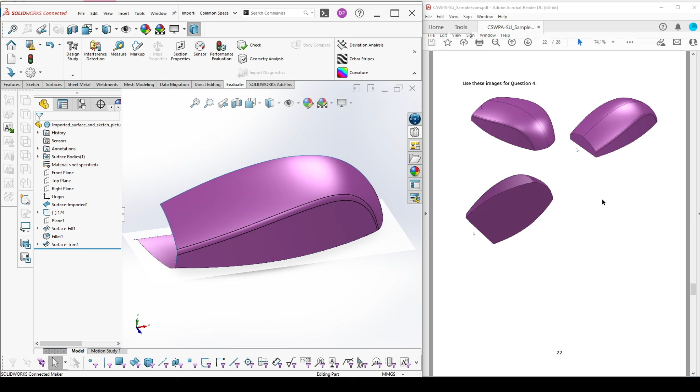SolidWorks Surface Sample Exam Question 4. In this question, you should use the surface which you have already created in the previous question. First, you will see some images which are related to question 4. Then you will see the question itself. You should complete the solid.

The material that you have to use is ABS, and the way you should complete it is by mirroring the existing surfaces and complete the steps to create the solid of the completed part. Then you have to apply the material ABS to the solid and measure the mass of our ready object.

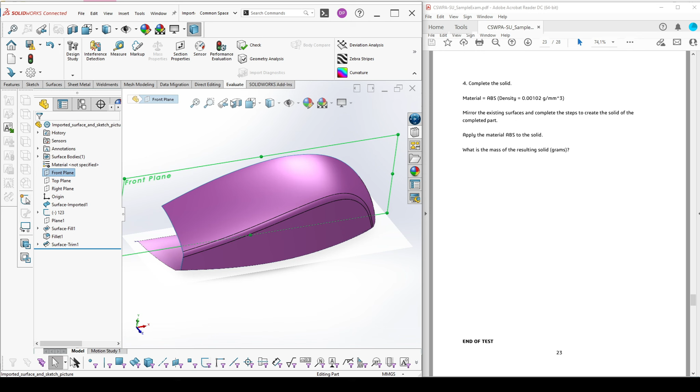So first we will pick the front plane, use the mirror feature, check that you use bodies to mirror, select your surface and then click OK. After we are ready with this step, I will hide the sketch picture.

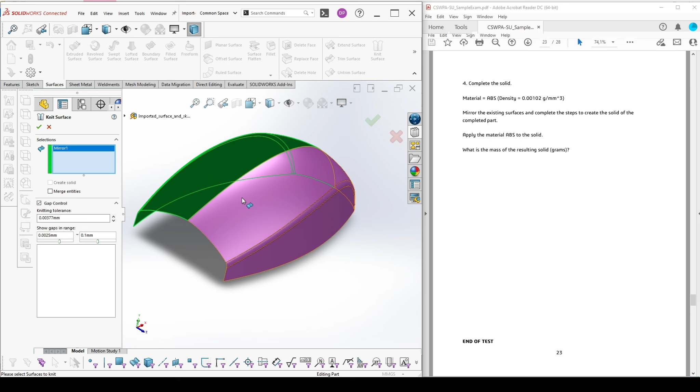You have to knit the two surfaces together and merge entities. Next, we have to fill the front and the bottom and to create a solid out of this. To fill any of these faces, we will need an additional line here.

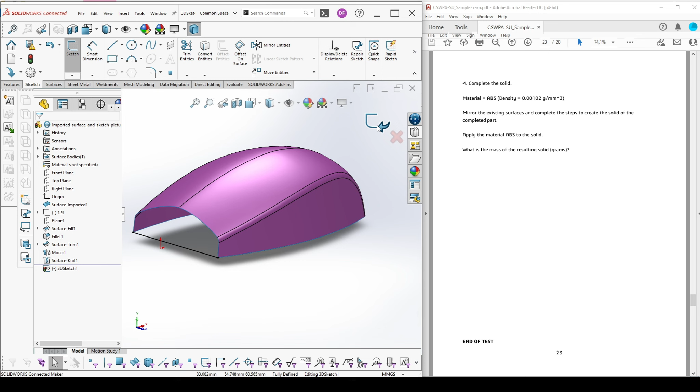You can do this with 3D Sketch and just draw a line which is coincident to the 2 points. Then you can use Fill Surface with picking all the contours in the front and check the option Merge Result.

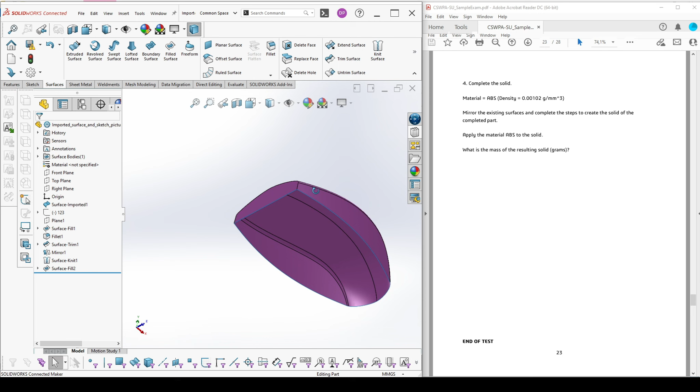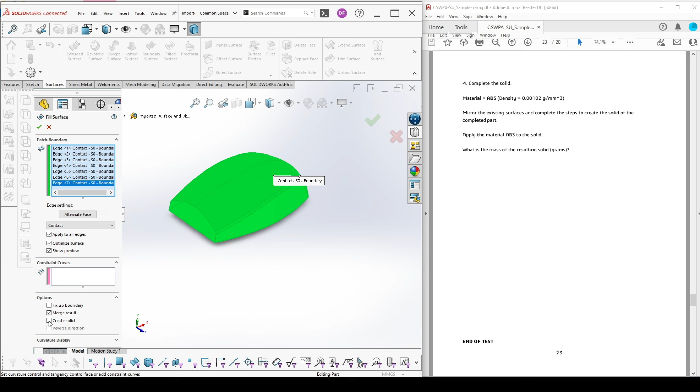Then we have to fill the bottom surface too. Pick all the edges that you have. And in this case, you will click not only Merge Result, but also Create Solid. And then we hit OK. Once we are ready with this solid, you can see here that we have one solid body.

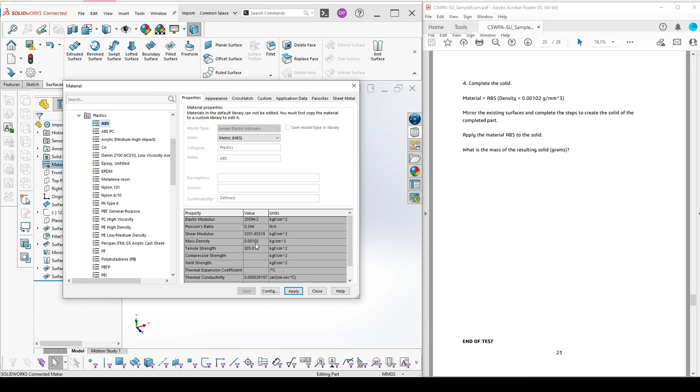We have to apply the material. We go to Edit Material, Plastics, and then we have ABS. Check the density if it's the same and hit Apply.

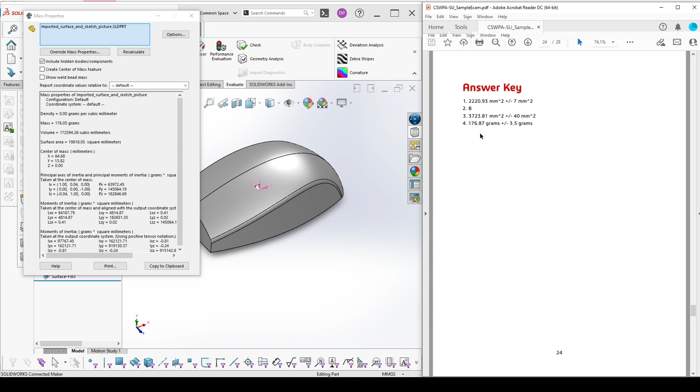Once our material is applied, we go to Evaluate and Mass Properties to check the mass of our model. Our model is 176 grams. Now we go to check the correct answer. It's not 100% the same, but it's within the tolerance, so our answer is correct.